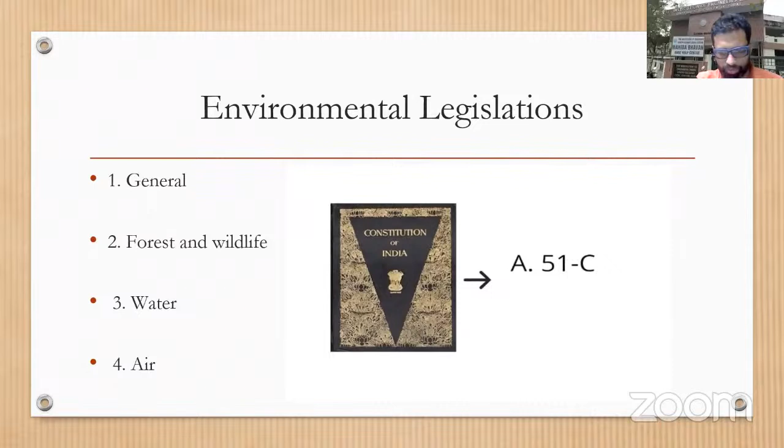I'm going to talk about one forum, the Stockholm Declaration 1972, which says the whole world has one environment. We can accept this with heart, right? The whole world is one environment. So accordingly we have to think and act to save each place. If I protect the environment at my place, my area, and similarly everyone protects theirs, then we are able to save the environment of the world.

For that, Article 51 of the Constitution of India says that we have to follow and implement a framework to save the environment. It means this article empowers our country and our parliament to frame and establish regulations through which we can save the environment, save the sanctuaries, and save our natural resources. This is shared in Article 51C.

Now, in general, how did it start? First, the international forum in 1972. After that, in 1986, the first Environmental Protection Act came, empowering the central government to protect and improve environmental quality, control and reduce pollution from all sources, and prohibit or restrict the setting up and operation of any industrial facility on environmental grounds.

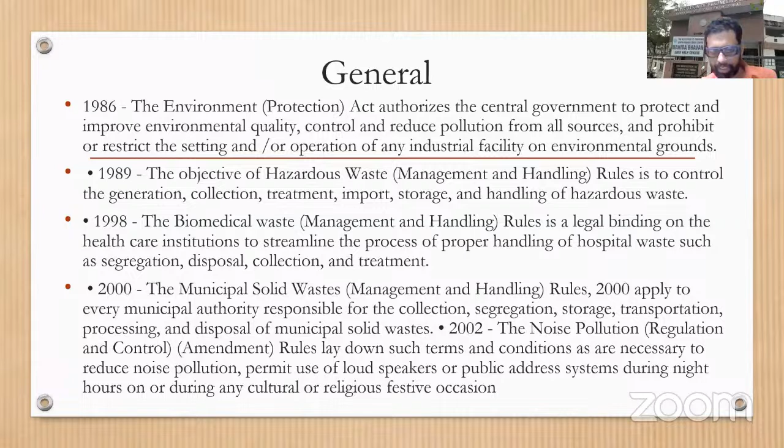If we talk about forest and wildlife, the Indian Forest Act of 1927 and its 1984 amendment were implemented regarding how we relate to the forest, transit of forest produce, and the levy on timber and other forest produce.

So in 1972, the Wildlife Protection Act, with its amendments, talks about the protection of birds, animals, and all the matters connected to them, whether it is their habitat or the forests that sustain them, right? In 1980, we implemented the Forest Conservation Act, with rules in 1981, which provide for the protection and conservation of the forest.

In 2002, right, we have the Biological Diversity Act, which provides for the conservation of biological diversity, sustainable use of its components, and fair, equitable sharing of the benefits arising from biological resources and the knowledge associated with them.

As concerns water, in 1974 the Water (Prevention and Control of Pollution) Act was established. It is regulated through the Central Pollution Control Board in Delhi. In 1977, the Water Cess Act provided for the levy and collection of a cess on water consumed by industry and local authorities. So we implemented these things so that we can reduce the wastage of water.

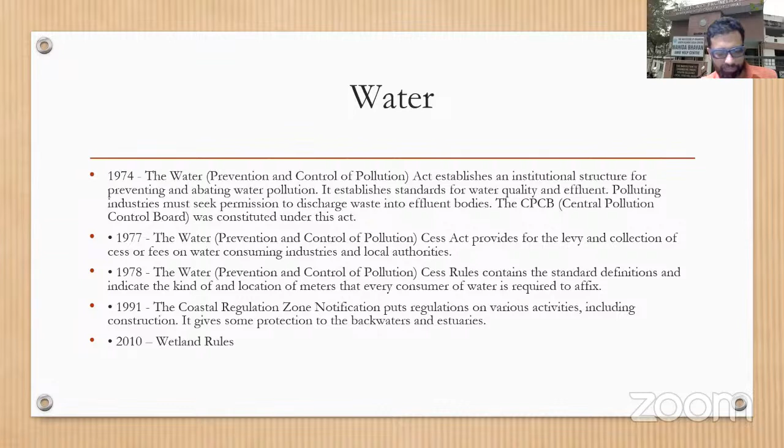In 1991, the Coastal Regulation Zone notification put regulations on various activities, including construction. It gives some protection to the backwaters and the estuaries. And in 2010, the Wetland Rules also came into the picture.

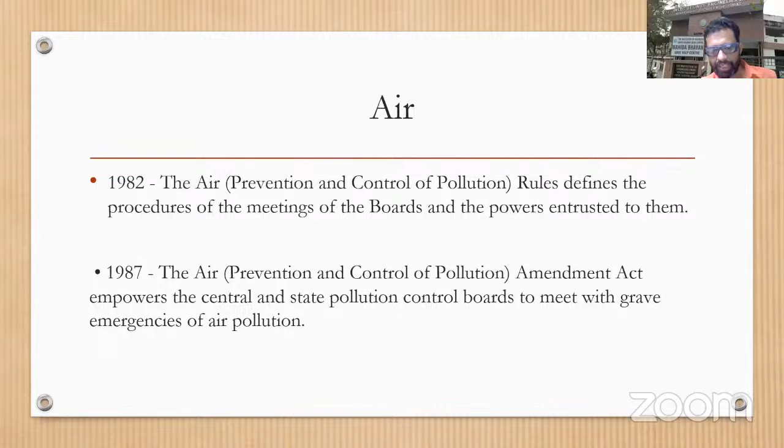As concerns air, we have also worked a lot in this regard. In 1982, the Air Rules defined the procedures for meetings of the boards and the powers entrusted to them. In 1987, the Air Amendment Act empowered the central and state pollution boards to meet grave emergencies of air pollution. Yes, so in India we are not only dependent on the Central Pollution Board, but every state has its own authority that can establish rules accordingly.

In 1986, we have the Environment Protection Act, which covers water, air, land, and the interrelationship existing between water, air, land, human beings, other living creatures, plants, microorganisms, and property. Environmental pollutant means any solid, liquid, or gaseous substance present in such concentration as may tend to be injurious to the environment. Environmental pollution means the presence in the environment of any environmental pollutant.

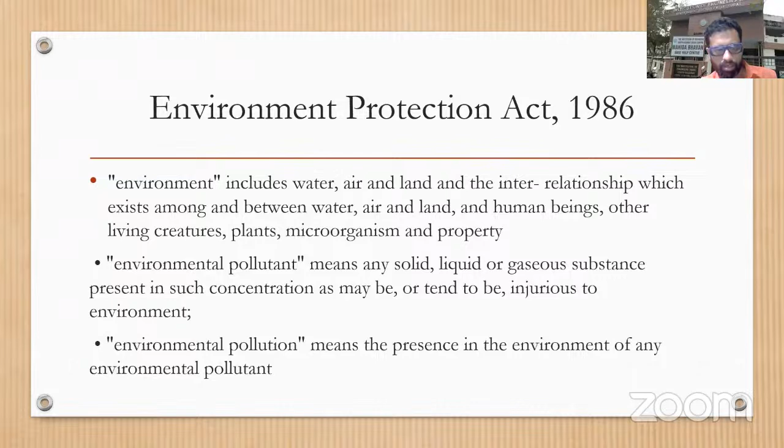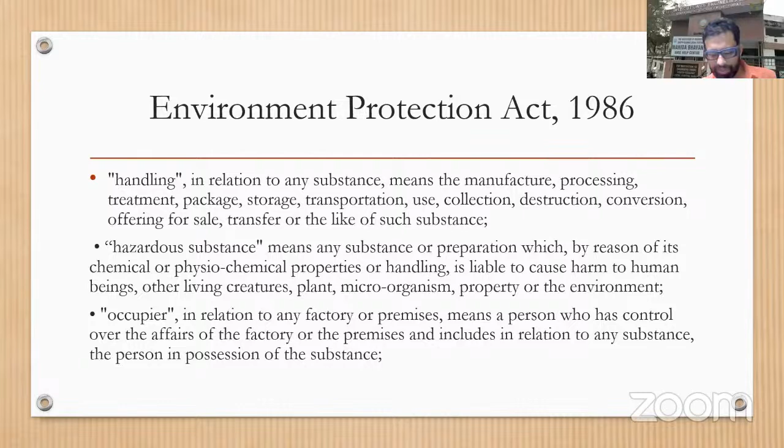Apart from handling, storage, and collection, we have also made frameworks and networks through which we can protect the environment. So these are all written, documented, and practiced accordingly. The framework has been given, and we are following its guidelines.

But the requirement under the EPA, the Environmental Protection Act, Section 7, says no person carrying on any industry, operation or process shall discharge, emit, or permit to be discharged or emitted any environmental pollutant in excess of the standards as may be prescribed. It means whatever practice, profession or business we have, it should not harm the environment in the short term or have adverse effects in the long term.

Section 8 says no person shall handle or cause to be handled any hazardous substance except in accordance with such procedure and after complying with the safeguards as may be prescribed. So suppose some businesses or authorities are using hazardous material, like somebody involved with X-rays and other hazardous things. They must follow the procedures, right? They have to go through the procedure, follow it, and proceed forward.

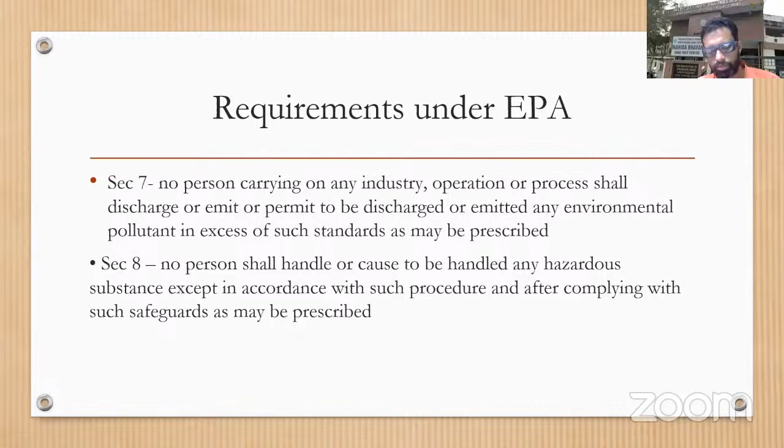Apart from that, in India we have the National Environment Tribunal Act. In this act there is strict liability for damage arising out of any accident occurring while handling any hazardous substance, and for the establishment of the National Environment Tribunal for effective and expeditious disposal of cases arising from such accidents, with a view to giving relief, compensation, and damages. Sometimes cyclones and natural calamities come, and in that way it is going to be more effective. That comes in the category of the National Environment Tribunal Act.

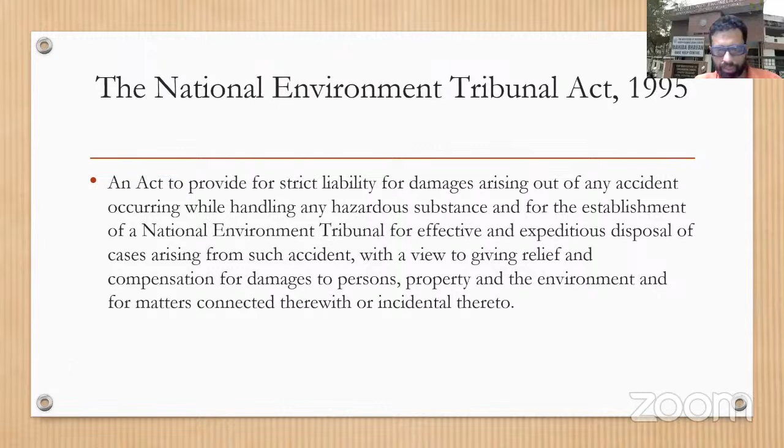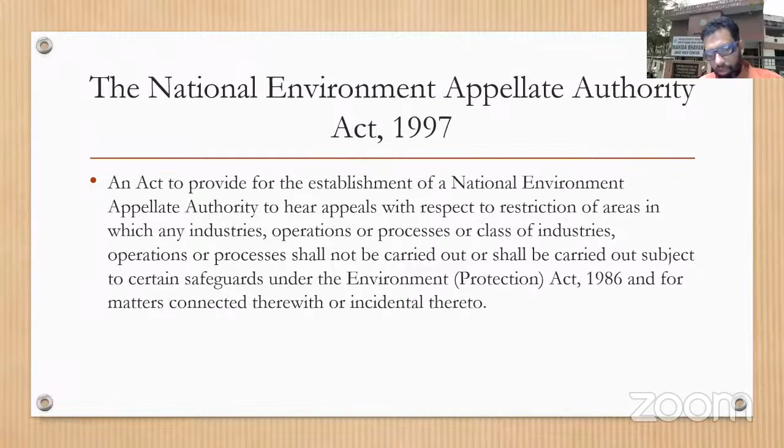Apart from that, we have also established the system of the appellate authority. This act empowers the establishment of the National Environment Appellate Authority to hear appeals with respect to restriction of areas in which any industry, operation, process or class of industries, operations or processes shall not be carried out or shall be carried out subject to certain safeguards under the Environment (Protection) Act 1986, and matters connected therewith or incidental thereto. So in this way, we have an authority to which we can appeal when things go wrong. So this is the brief detail about environmental legislation in India, right?

So now I'm going to hand over to my ex-colleague Umesh Mate. He's going to present the systems we call DeNOx and DeSOx, and after that I'm again going to take the session on how we control SPM and NOx, and what lucrative benefits are present, in my next sessions. So welcome Umesh.

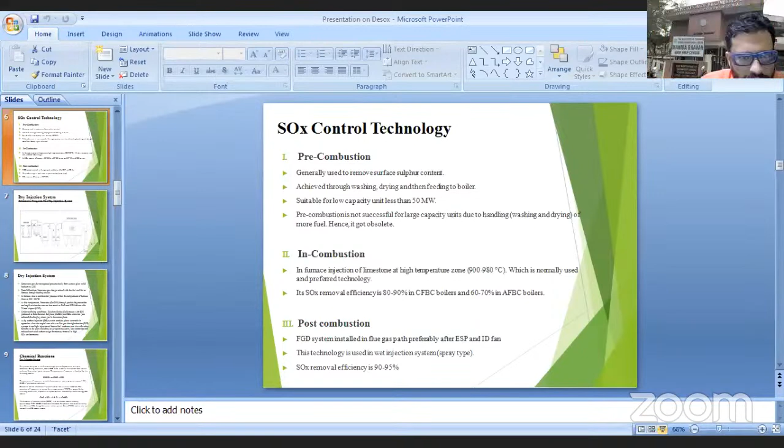Pardon, Umesh, your slide is not moving. Slide is not moving? Yeah, it is still in the first slide. Just please change it. Now? Now just put it in full slide mode. Slideshow. Now it is visible? No, your screen sharing is paused. Oh, okay, just a minute. First stop the screen and then I will share it again. Yes. Perfect, good. Continue. Should I go to the previous slide? Yes, you can do slides 1 and 2 and then pick up. Okay, sorry for the inconvenience.

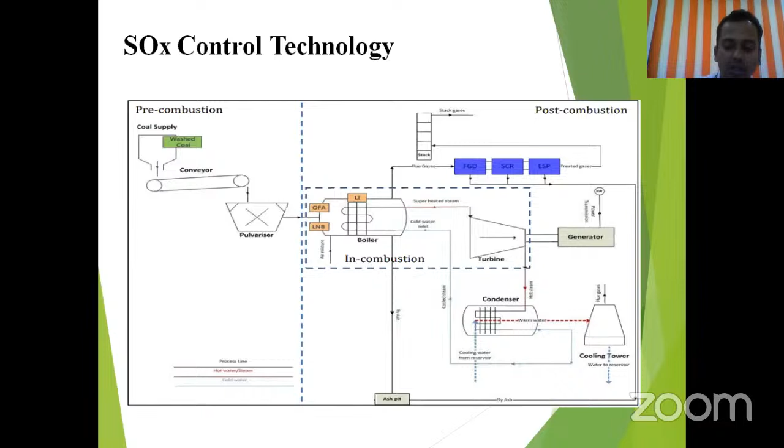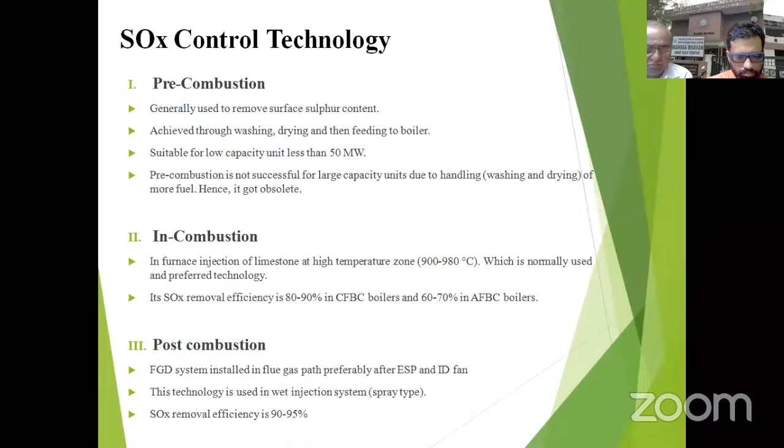I was talking about SOx control technology, which we do in 3 parts: pre-combustion, in-combustion and post-combustion. Pre-combustion technology is used to remove the surface sulfur content. Sulfur in the fuel is of 2 types: surface sulfur present on the surface of the fuel, and inherent sulfur. Removal is achieved through washing, drying, and then feeding to the boiler. Normally this technology is used for low capacity units less than 50 megawatt, because fuel handling capacity is less. It is not suitable for large units due to the washing and drying of fuel. Hence this technology became obsolete.

The next is in-combustion technology, basically furnace injection technology. Limestone is fed into the boiler at a high temperature zone in the furnace, around 900 to 980 degrees centigrade, achieved through burning of the fuel. At this temperature limestone is fed into the furnace. This is a dry injection system, and the SOx removal efficiency is 80 to 90% in CFBC boilers and 60 to 70% in AFBC boilers.

Then the next technology is post-combustion technology, installed in the flue gas path, preferably after the ESP and ID fan. This is basically a wet FGD system, spray type. I will show the principle of this wet technology in my further slide. Here, SOx removal efficiency is very high, almost 90 to 95%.

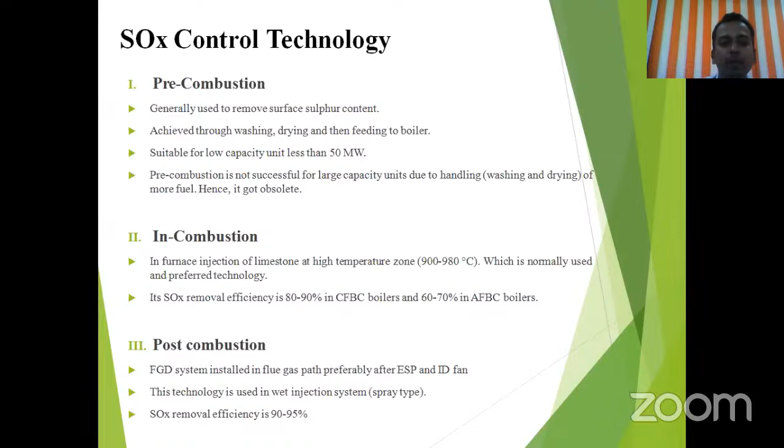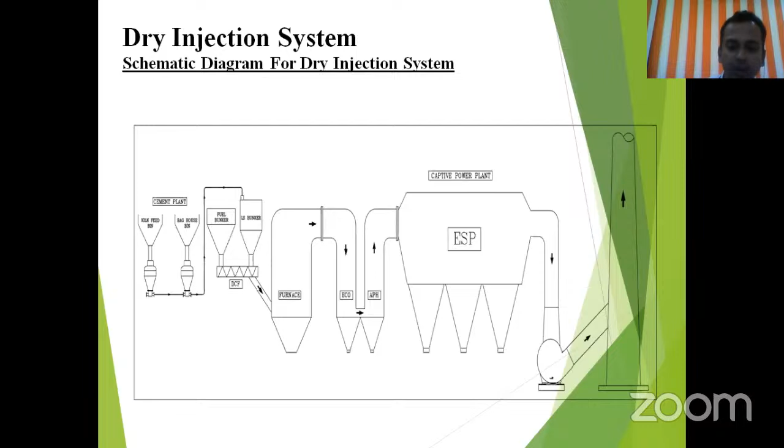Yes, this limestone powder is transported pneumatically from cement plant to LS bunkers at CPP. And from these LS bunkers, limestone powder gets mixed with the fuel and fed to furnace through feeding chutes. In furnace, due to combustion process of the fuel, the temperature of furnace rises to 900 to 980 degrees Celsius.

At this temperature, limestone, through particle fragmentation and rapid calcination, converts into reactive CaO, and this carbon dioxide is driven off with the water vapor. Further, under oxidizing conditions, this calcium oxide reacts with the SO2 produced to form calcium sulfate, and SOx emission gets reduced, discharging clean gas in the atmosphere.

This is basically a dry sorbent injection system, which enables plants to remain in operation when the capital cost of a wet flue gas desulfurization is high. The dry sorbent injection initial capital cost is low as compared to wet FGD system. And this injection of alkali sorbents can also offer other benefits to the plant, including lower operating cost, less corrosion, and reduced activated carbon usage for mercury removal in high SO3 environments.

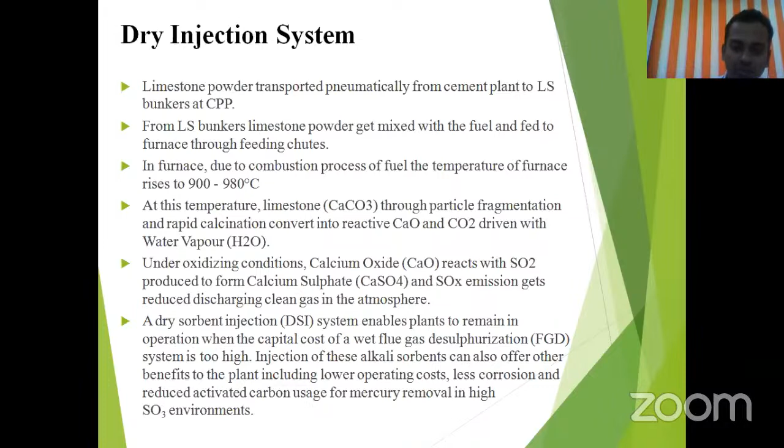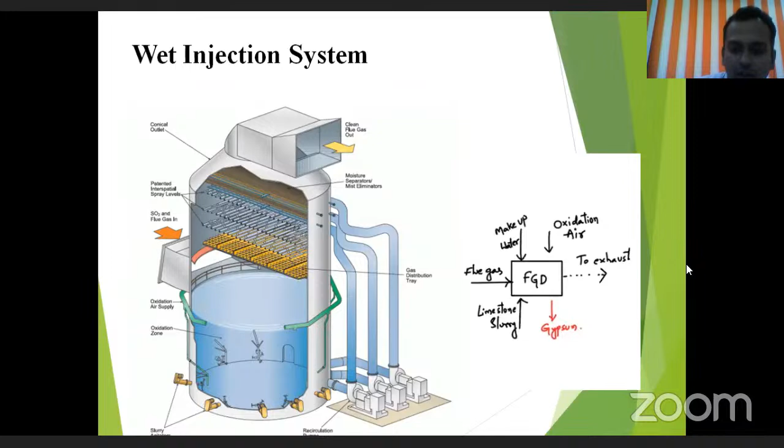This is the reaction of wet FGD system: limestone CaCO3 reacts with SO2 and water to form calcium sulfite, and carbon dioxide is removed with the flue gas outside. This calcium sulfite hemihydrate further reacts with the water and oxidation process, forming gypsum.

Yes, this flue gas from ESP enters near the bottom of the absorber and travels towards the top of absorber through gas distribution tray. Alkaline slurry is present inside the absorber, which is pumped to the top of absorber via recirculation pump into the spray level to be sprayed on the flue gas. Flue gas reacts with the alkaline slurry in order to form CaSO3, calcium sulfite.

This calcium sulfite then settles down to the bottom of absorber. Clean gas then goes through the mist eliminators to remove the moisture and finally goes to the stack. At the bottom of the absorber, oxidation air is passed with the help of oxidation air supply and mixed with calcium sulfite to produce gypsum, which is then used for further process.

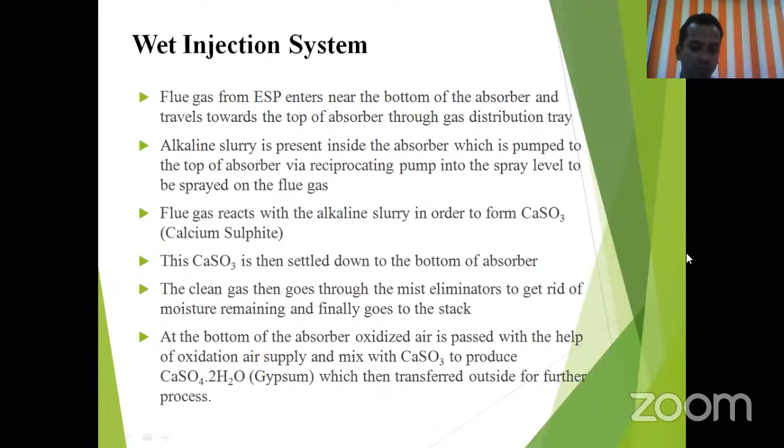Coming to mass balance, this is typically sulfur S plus O2 gives SO2, as you all know. So suppose 32 grams of sulfur and 32 grams of oxygen combine, it gives 64 grams of SO2.

I have taken an example of a typical 125 megawatt coal-fired power plant, where approximately 100 TPH of fuel is being fired. Suppose 0.5% sulfur is there in the fuel, so if you fire 100 tons of fuel, 0.5 tons of sulfur content is present in the fuel. If the unit is running for 1 year, that is 365 days, I've calculated total sulfur production.

SOx is almost double of the sulfur, meaning 1 kg of sulfur gives 2 kg of SOx. So if you calculate the SOx produced per year in this 125 megawatt coal-fired power plant, it's almost 8760 tons of SOx which is produced. You can see how much SOx this power plant is generating, 8760 tons, which is very high.

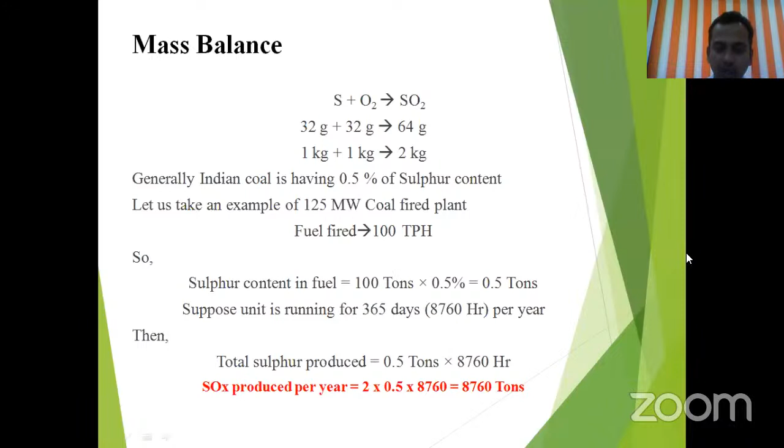This is the mass balance of the wet FGD system. This is the scrubbing module, which I have explained in my previous slide. You can see the flue gas, this SO2, this is a 500 megawatt unit, pulverized coal-fired plant.

These are the parameters I have taken for the 500 megawatt PF fired unit, where the SOx generated is 19.1 meter cube per hour. After this scrubbing module, almost 90% sulfur capture has happened, and the clean flue gas is almost 1.91 meter cube per hour, it has been reduced. This is the makeup water required, 68 TPH.

This is the mass balance of a typical wet FGD system.

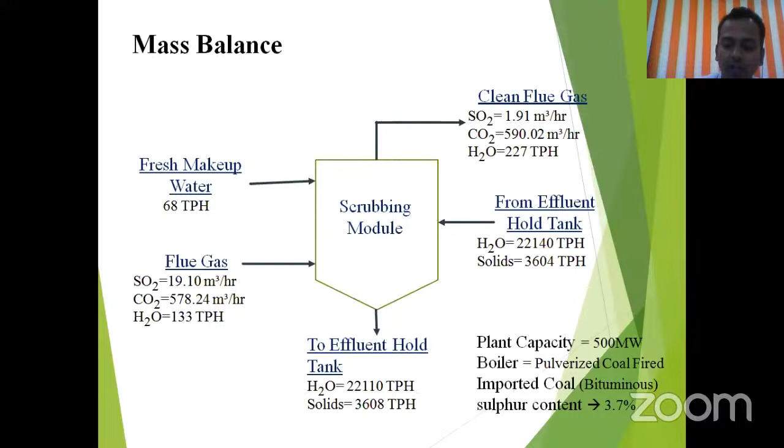Coming to reaction efficiencies: a dry injection system's efficiency is around 80 to 90% in CFBC and 60% in AFBC boiler, because CFBC has a long shaft furnace where residence time of the fuel is high compared to AFBC boiler. Hence combustion of the fuel and reactions with the limestone are very good and very fast in case of CFBC boiler, so its dry injection efficiency is higher than AFBC. Wet injection system has a very high efficiency of 90 to 95%.

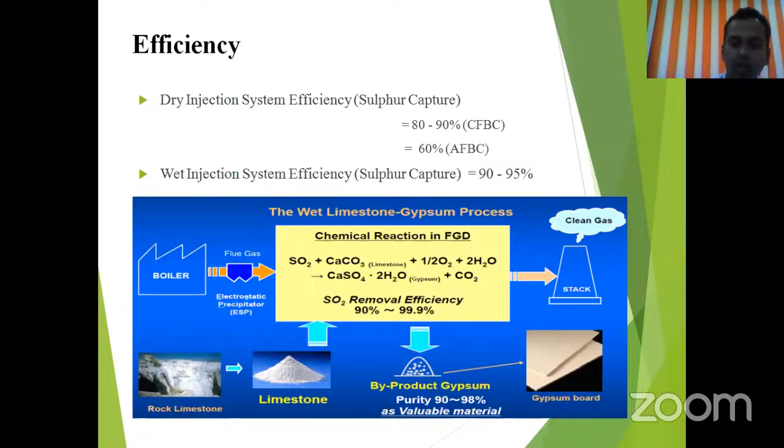Coming to environmental norms, SOx has restrictions. The units installed before December 2003, for less than 500 megawatt units, the limit was 600 milligram per nm cube, and for units greater than or equal to 500 megawatt, it is 200 milligram per nm cube.

Units installed after January 2004 and up to December 2016 had the same restrictions levied: for SOx, less than 500 megawatt is 600, and greater than or equal to 500 megawatt is 200. Units installed after January 2017 have a restriction of 100 milligram per nm cube for all capacity power plants.

Now, what are the challenges for this FGD system? The wet FGD system basically has a high capex, a high capital cost because of imported items which we have to bring in. There are so many items we have to import from abroad, and due to the high setup cost, this is a very huge challenge for a wet FGD system.

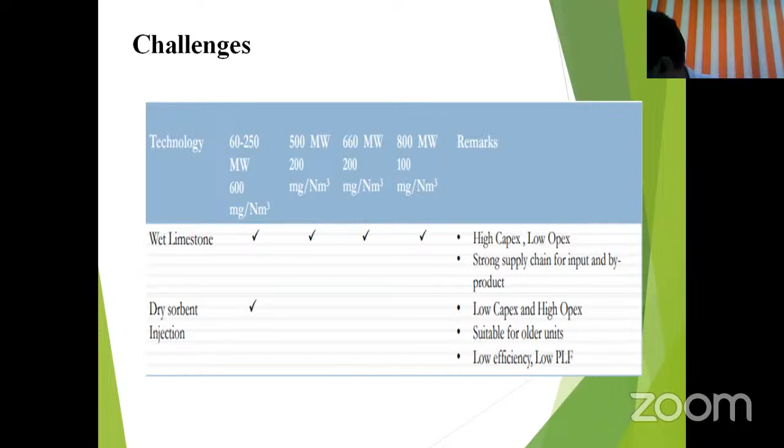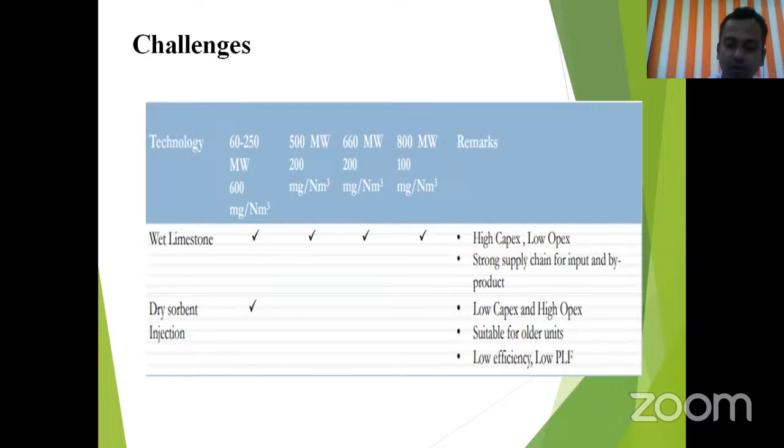Operational cost is low, and there's a strong supply chain needed for input and byproduct. For the dry sorbent injection system, the capex is low, meaning capital cost is low compared to wet FGD, but operational cost is high, and maintaining the system is very costly. This dry FGD system is basically suitable for older units and low efficiency, low PLF plants, which I told you in my previous slide.

Further challenges: technology suppliers are mostly situated abroad. Mostly we have to import items from China and Germany for installing this FGD system, wet FGD system. Indigenous manufacturing capacity needs to be developed and ramped up fast. FGD retrofit is difficult in many of the older stations due to space constraint.

FGD retrofit is difficult in many of the older stations due to space constraints, because older units were already optimized for less space, and fitting this FGD is a difficult task. Approximately 80,000 megawatts of total installed capacity of units less than 500 megawatts will be affected due to no availability of space for the retrofit.

Large consumption of water is required, about 0.25 meter cube per hour per megawatt of water, for wet FGD. This is one of the challenges in wet FGD systems, along with the impact on power supply position due to closure of most coal-based capacity for non-fulfillment of environmental norms.

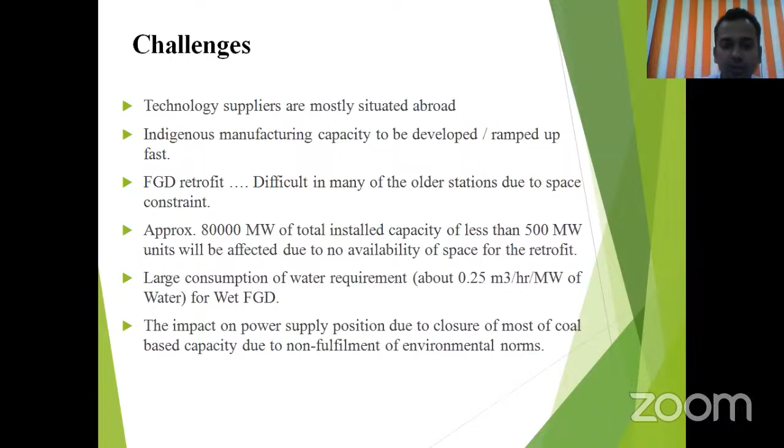These are further challenges: huge capacity with deadlines. The FGD market is now developing in India.

Recently, just 2-3 days back, I got to know that this FGD system deadline has been extended from December 2022 to 2025, because of the challenges I mentioned. It is almost difficult to install the FGD system in such huge capacity power plants. Number of units is a big challenge for us; retrofitting and installing the FGD in this lesser time is a very difficult task. So that's why, due to COVID also, the government has again extended this FGD installation deadline to 2025.

Now coming back to challenges: limited vendors are available, about 30% of FGD items need to be imported. There's increasing manufacturing time due to overbooking of suppliers, increasing cost, and funding issues in private plants.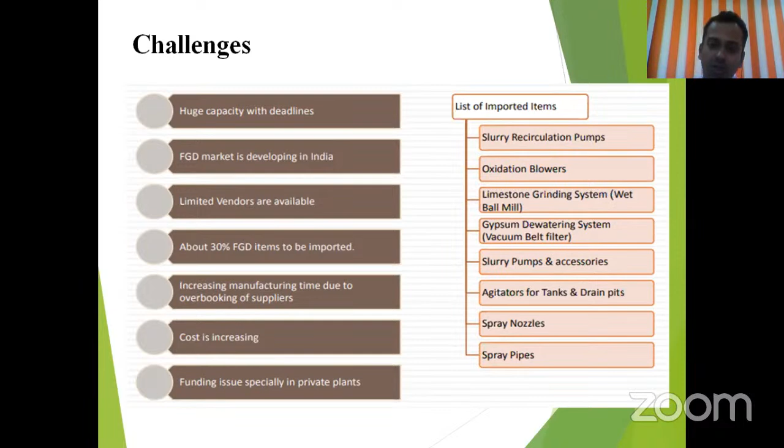These are the list of imported items which we import from Germany and China: recirculation pumps, slurry recirculation pumps, oxidation blowers, limestone grinding system, gypsum dewatering system, slurry pumps and accessories, agitators, spray nozzles, spray pipes - all are imported items.

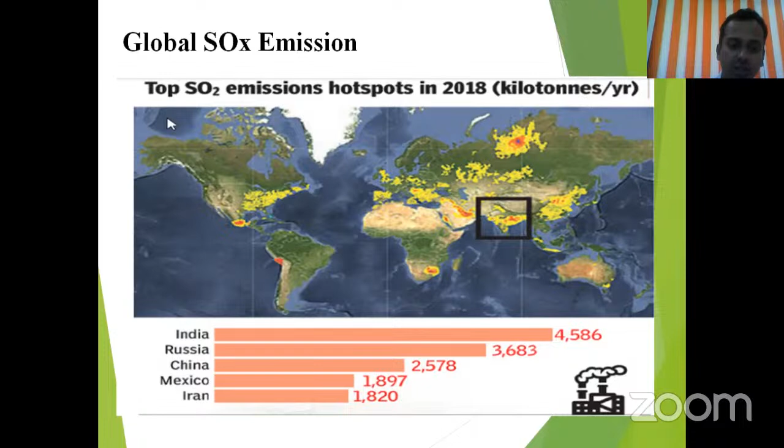Global SOx emission data for 2018: total SOx emissions in 2018 show India was number one in 2018 for SOx generation, approximately 4586 kilotons of SOx was generated in India. Second is Russia, third is China, fourth Mexico and Iran.

Now, what is the effect of SOx? Basically, the effect of SOx on environment is when SO2 combines with water and air, it forms sulfuric acid, which is the main component of acid rain. This acid rain can cause deforestation and also can affect aquatic life, acidifying the waterways to affect aquatic life, flora and fauna. This acid rain also results in corrosion of buildings and structures, and chimneys in the power plant.

Further, the effect of SOx on health: SO2 can cause respiratory problems such as bronchitis and can irritate your nose, throat and lungs. It may also cause coughing, wheezing, asthma attacks, and it has also been linked to cardiovascular diseases. So it has a very dangerous effect on the environment as well as on the health of the human body.

I would also like to share the cost data to set up this FGD system in thermal power plants. As per available data, installation of FGD in thermal power plant costs approximately rupees 19 lakhs to 90 lakhs per megawatt. Obviously it depends on the size of the unit, number of units, the locations, and the technology used.

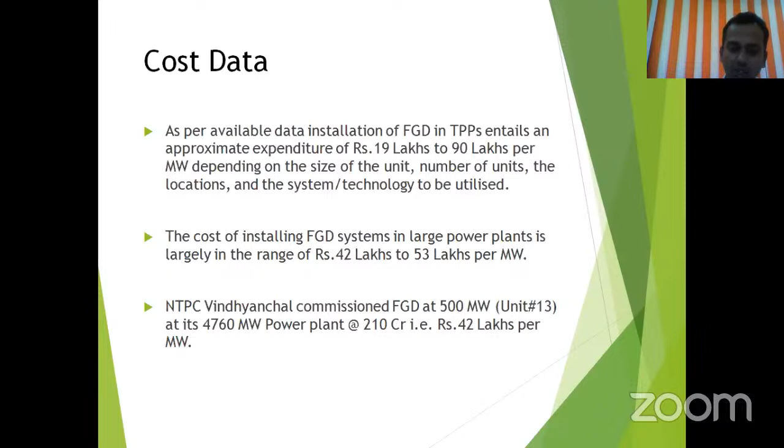The cost of installing FGD systems in large power plants is largely in the range of rupees 42 lakhs to 53 lakhs per megawatt. Recently, NTPC Vindhyanchal commissioned FGD at 500 megawatts, unit number 13, at its 4760 megawatt power plant, at 210 crores, that is rupees 42 lakhs per megawatt. So we are not very far, and that's all. Thank you.

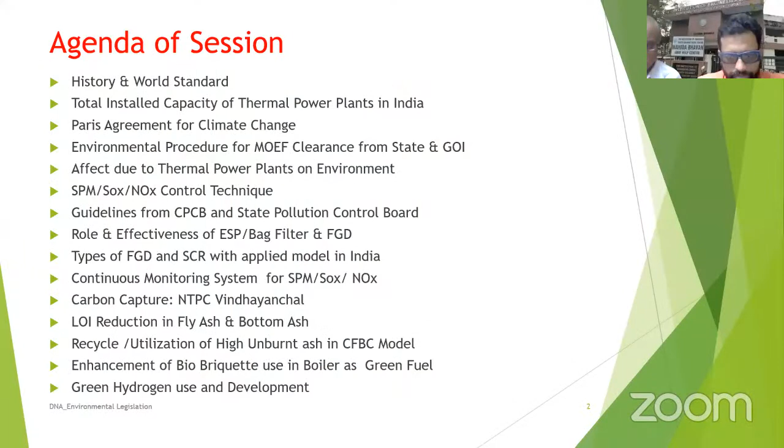So once again, welcome to all the participants of today's webinar, and thank you for connecting and showing confidence with this. I am Dinanath Akela, and again I am going to talk about this SPM and NOx system. Before that, I'm going to talk a little bit about what we currently follow.

In regard to emissions, first I'm going to target the emission rate. The average emission in our country from 2019 is growing at a percentage of 1.4%, and the average per decade, from last decade, is 3.3%.

If we talk about what the government of India has done in context of controlling emissions, first I would like to thank the Supreme Court that with their decisions and strict application, the Bharat Stage 6, BS6 norms have been implemented, and lots of advantages and emission problems are going to be sorted out.

The second is about the National Solar Mission. As we talk about the era of the last decade, around 2005-2006, the ratio of thermal and solar power was 80% and 20%. But right now we have some latest data showing this ratio has lots of differences; now it is approximately 67 to 70% thermal and 30% is reached right now through the operation of solar energy and solar plants.

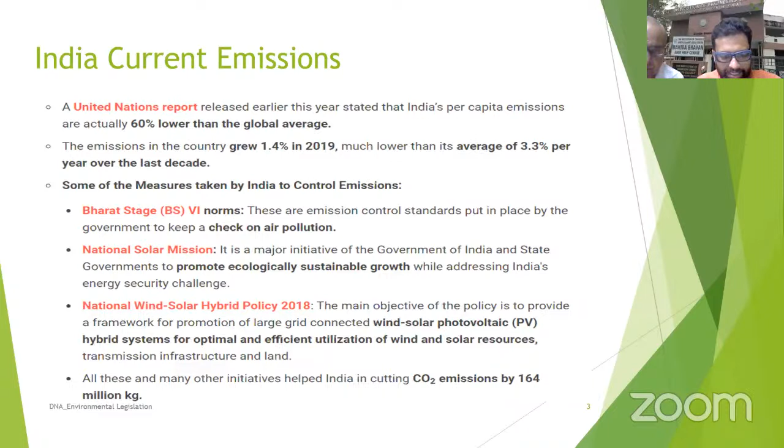Next, what is making a big difference is the National Wind and Solar Hybrid Policy of 2018. This initiative is going to help India cut off CO2 emissions by 164 million kg.

If you talk about last year's COP26 address by the PM, we are going in the way of non-fossil fuels. We are going to complete 50% of our fuel and energy requirement through renewable energy by 2030, bring down the carbon intensity of the Indian economy by more than 45% by 2030, and cut down net projected carbon emissions by 1 billion tons from now until 2030. We have also targeted net zero carbon emission by 2070.

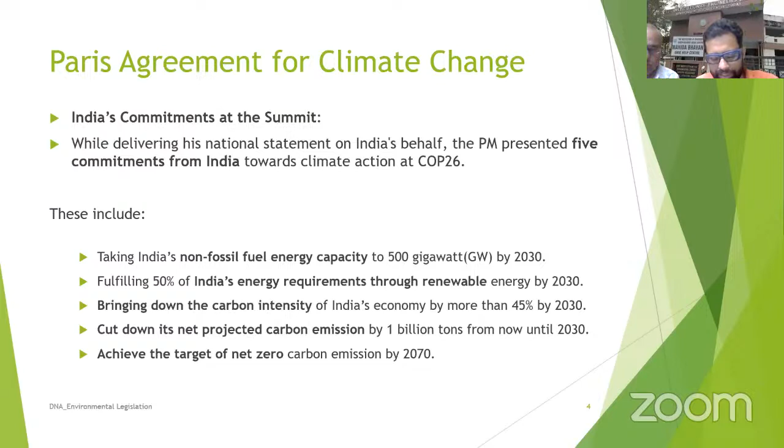So this is a little bit about the targets we have set for the future. Now I am going to give you details about the severity of emissions. I have taken one example of a 500 megawatt coal-based power plant, where we are using domestic Indian coal, and in that category I'm going to tell you how severe it is.

So if we talk about how much flue gas emission is going to be generated, that is 1760 cubic meter per second. And if we measure on the average value of 100 milligram per normal meter cube of SPM, then it is going to produce a total of 472 kg per hour.

And if we talk about SO2, I'm going to calculate on the basis of only 0.5% of sulfur in the coal, right? On that basis, if we calculate for 2 x 500 megawatt PF boilers, it is going to generate 8,600 kg, or we can say 8.6 ton per hour of SO2, right? So definitely it is going to harm society and the environment a lot.

That's why it is a big concern of the Central Pollution Control Board and the authorized authority. If you talk about NOx, it is going to generate 2.7 ton per hour. So this is some data. And now, what is the world going to maintain, and what standard do we have?

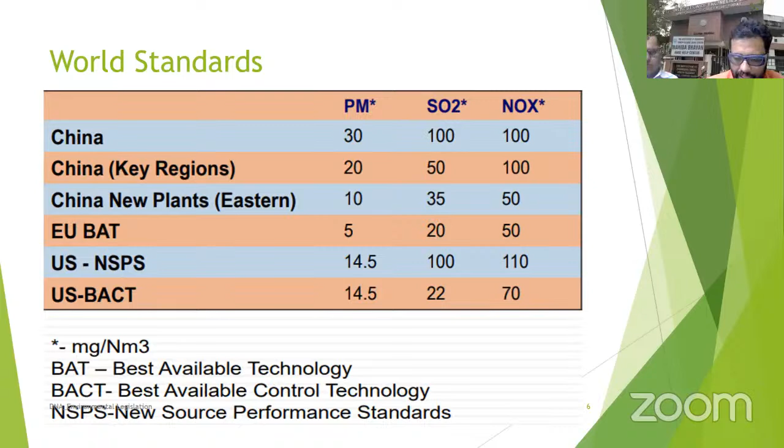Right. So PM means the particulate matter. In China, they have the target of 30 milligram per normal meter cube, SOx is 100 and NOx is 100. So the same we are also going to maintain in India too. So this is what we are going to show. This was a little bit older data, right?

So now the extensions of the deadline for implementation of all the measures, right? 30 of SPM, 100 and 100 of NOx had the deadline of 2022, but it has shifted in the last amendment, on 5th of September 2022, and the next dates come in 3 phases. First is 23-25, second is 24-25, and third is 25 to 27. Based on capacity and the level of their emission, the deadline is going to be set.

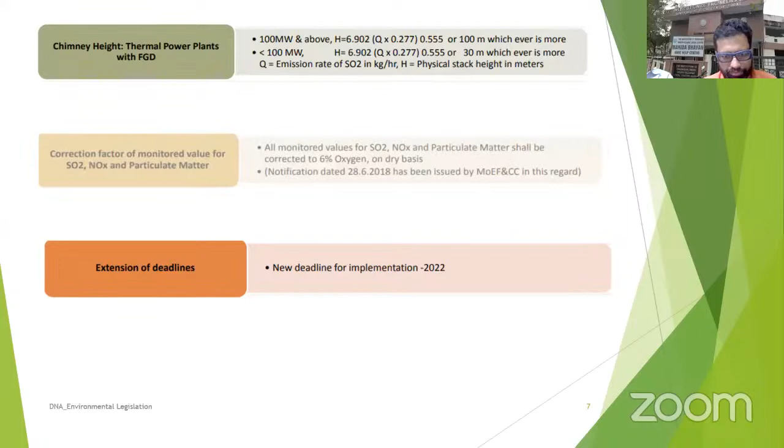Now, what issues are we facing with the regulations we are going to implement? The first thing is that this requires funds, and these funds we have to cope with either through capex or through opex, right? Apart from that, if we go through the evolution of the emission standards in the thermal sector, first in 1984 we set PM at 150 milligram per normal meter cube. After that, in 1989 we set the stack limit, right? The stack limit is 14 Q to the power 0.3. We set the stack height with this formula.

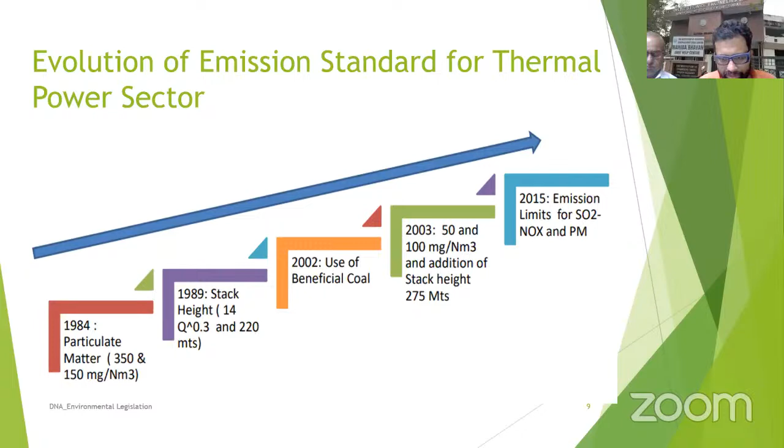After that, to minimize the SOx and sulfur, we used beneficiated coal. In 2003, we set the limit of 50 and 100 milligram per normal meter cube, and the stack height for additional is 275 meter. In 2015, we also set new limits for SOx, NOx and particulate matter too. So this was the data for the environmental norms we were going to follow from January 2017, but it has to be changed a little bit.

Some of the participants want to know about mercury, right? They asked the question in the chat box about mercury, so I'm going to tell you about that. Indian coal has a very small amount of mercury, so that's why this limit is very low. It is in the range of 0.03 milligram per normal meter cube.

If we talk about consumption, the specific water consumption per megawatt hour is 3 meter cube, and we have set the target for zero liquid discharge, right? Which again was implemented on 19th of October 2020.

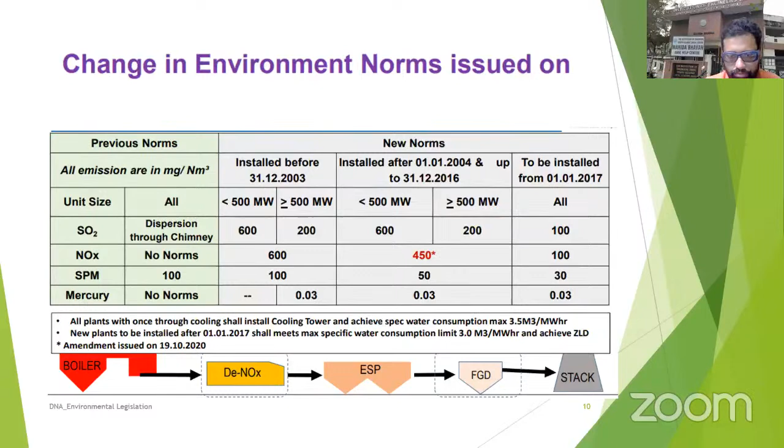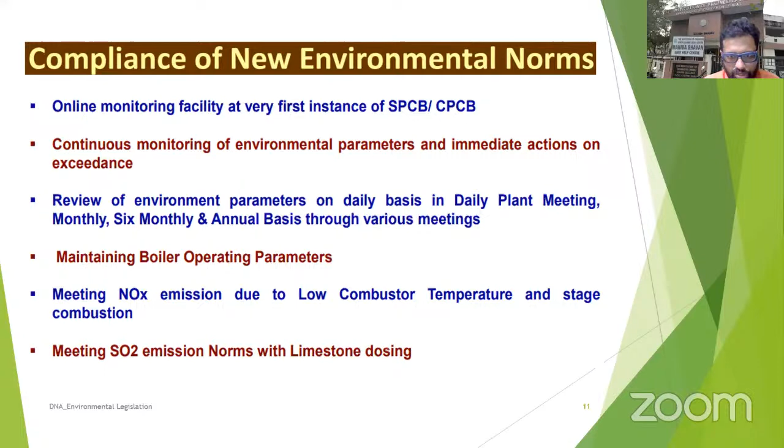But one of the good things is that all the plants have to show their current emission values at the entry gate of their plant, and this data is now connected with the state pollution control boards and the central pollution control boards, right? Just to add one thing: last week the government of Rajasthan declared that some installations have achieved this, and their real emission data values are coming to the state pollution control boards.

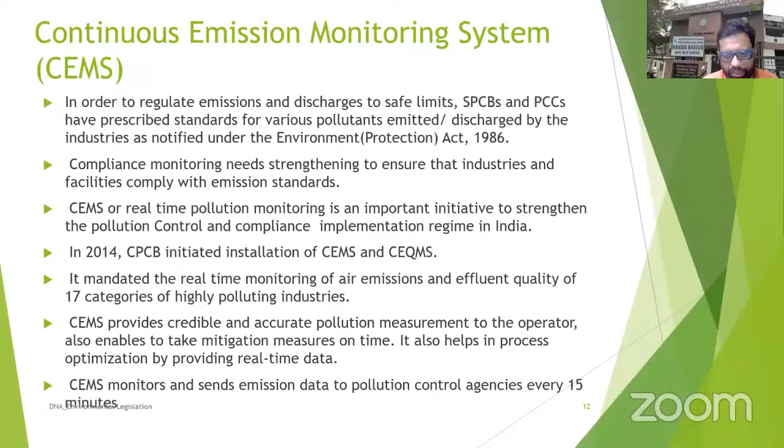So this way we have to continuously monitor every industry: what values they operate at and what values they maintain. For that, we have a technology called continuous emission monitoring systems. Depending upon the capacity and the installation, we put this CEMS at one-third of the height of the chimney, and through this CEMS we get real-time data on SOx, NOx, and SPM.

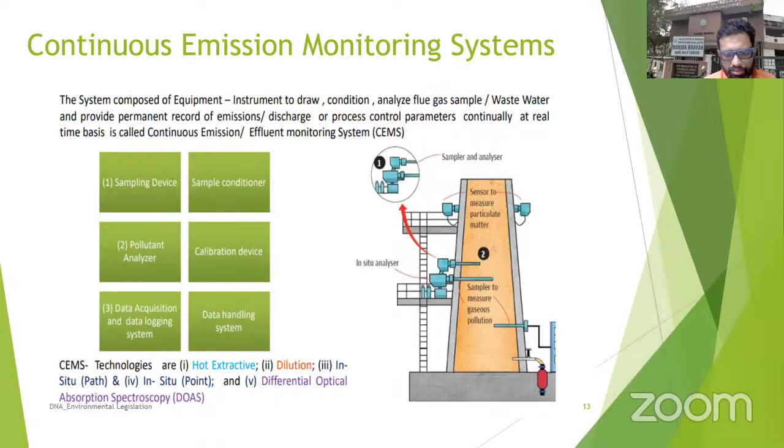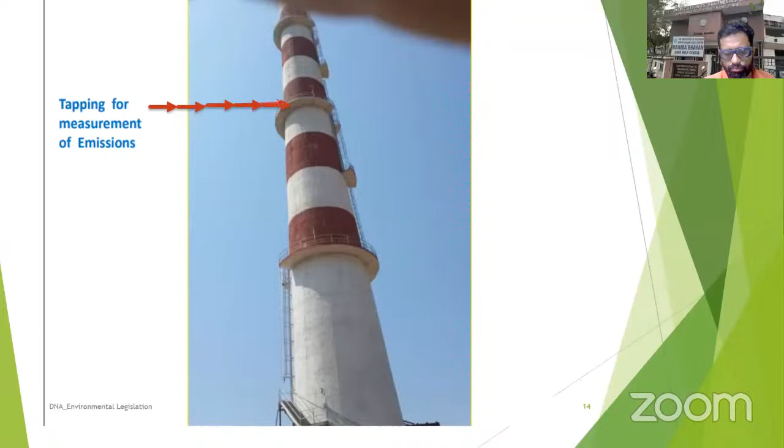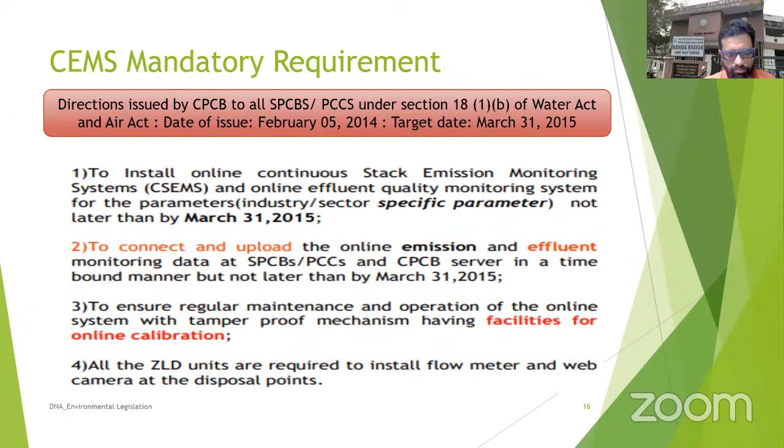So we have advantages of the CEMS: the real-time data we are getting, and remote access for the operator and regulator. The data comes on a bimonthly or quarterly basis, so that they can see the data, cross-check it, and check their calibration reports. Based on that, they approve the reports.

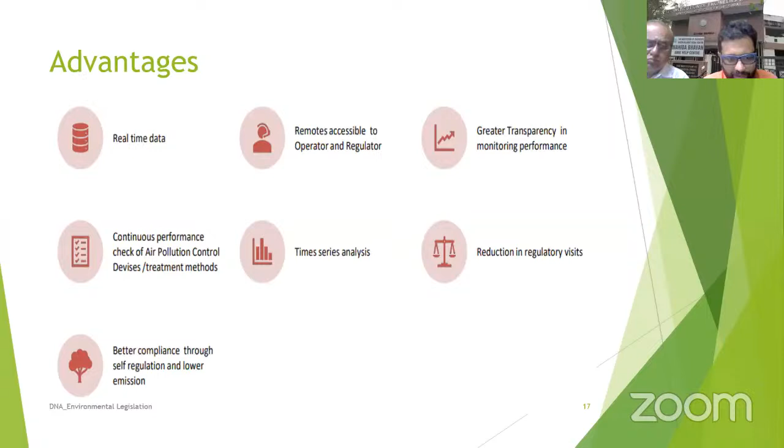Now, if we talk about SPM, suspended particulate matter, the details of what we are going to analyze I have collected from the list from the Ministry of Environment, Forest and Climate Change, where these details are mentioned, along with the method by which we analyze them.

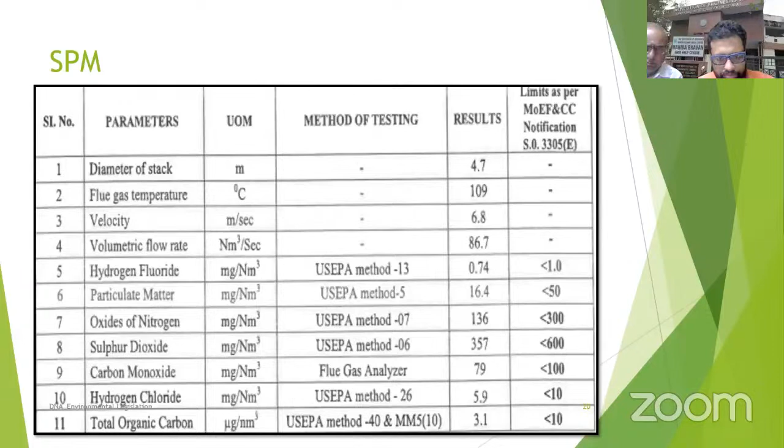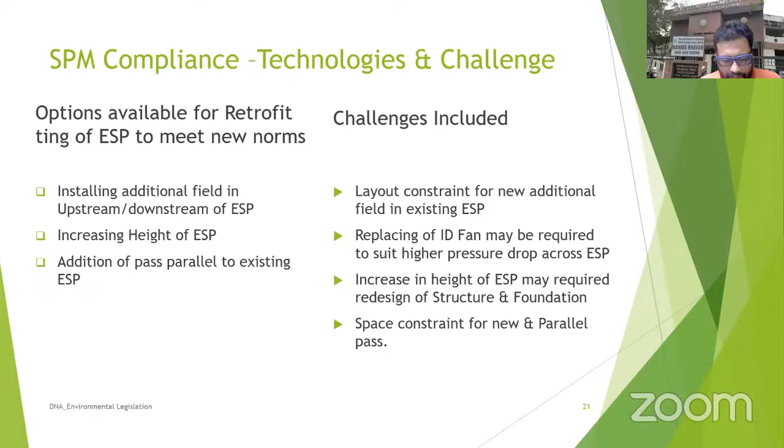For SPM, we have to apply the ESP, right? Suppose our existing ESP is not capable of meeting the desired SPM limits; in that case we have to place a new ESP or add another field so that we can meet the required standard. This is the predicted emission of a 500 megawatt coal-fired power plant with Indian coal, as I have noted here.

Suppose we have 500 megawatts. I take only Indian coal, 100%, with a consumption of 7,000 tons per day, and the average sulfur content of Indian coal is 0.27%, right? On that basis, the sulfur burned per day is 18.9 tons and the emission is 37.8 tons.

Because we know S plus O2 forms SO2. 32 and 32 make 64. That's why if the sulfur is 1, the SO2 will be double. So you observe here that the SO2 is double the amount of sulfur burned. Based on that, I calculate, right?

Please look at this data showing how much SO2 emission there is in ppm. It comes to 359, right? But we have set limits right now, which is 200 as of 2016.

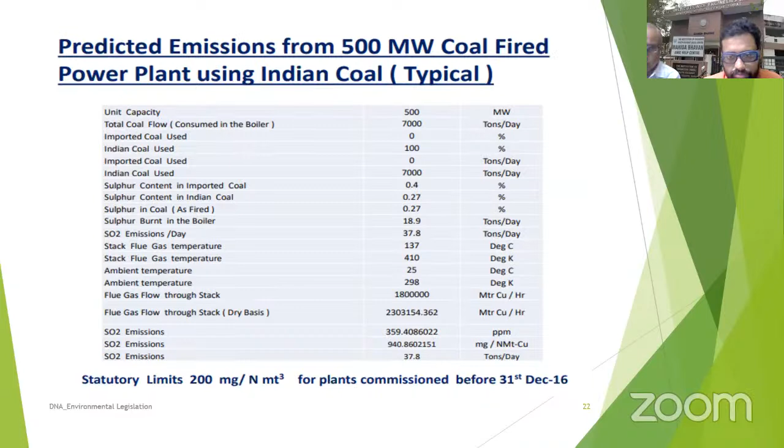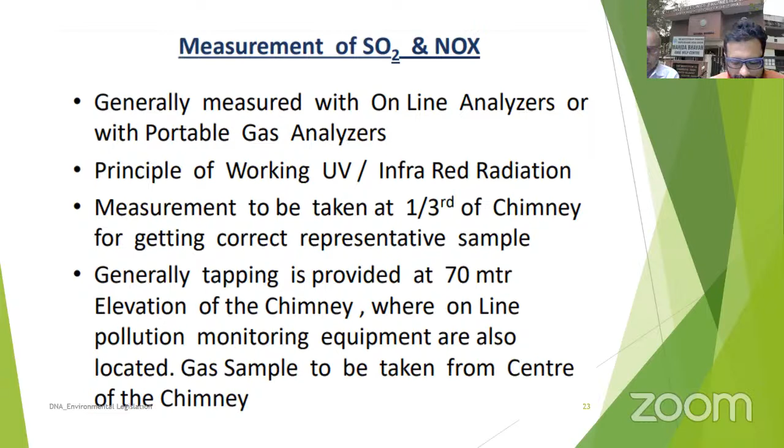But as of now, we are following the 1st August 2017 norms, so it should be less than 100. Right. So for that, we have to use the FGD or DeSOx system. For the measurement of the SOx and the NOx, we have the analyzer systems, which work on the infrared radiation method, and we place this device at 1/3 of the chimney. That depends a little on the size and the capacity of the unit, but generally we can do it. We can take the sample and cross check and calibrate with the standard.

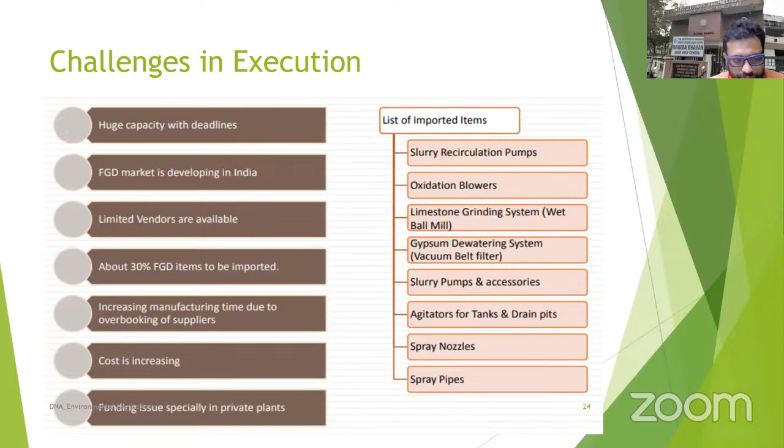Now, why is it not going in a smooth way? Because of the challenges in execution, right? The plant is running, we need shutdowns, and the spares and materials are required, right? These materials are imported, about 30%. The ordering and delivery is a time-taking process. The cost also contributes. So that's why the execution has challenges.

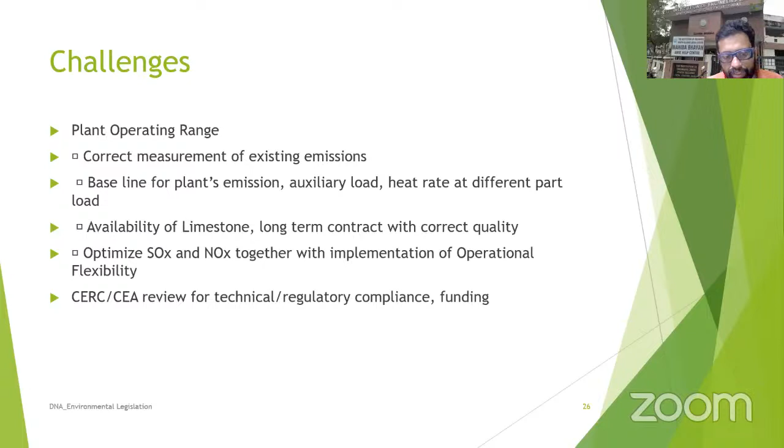Right. Other factors. So we have decided to go phase wise, right? So that when we have the opportunity during the shutdown periods, we can implement the systems. The challenges: the plant operating range, the correct measurement of existing emissions, the baseline plant emission, auxiliary loads, heat rate at different parts of the load, and availability of limestone, because in SOx control we use lime. Optimization of SOx and NOx versus operational flexibility, because if the unit is working on part load, it is difficult to judge the correct amount of limestone feeding required.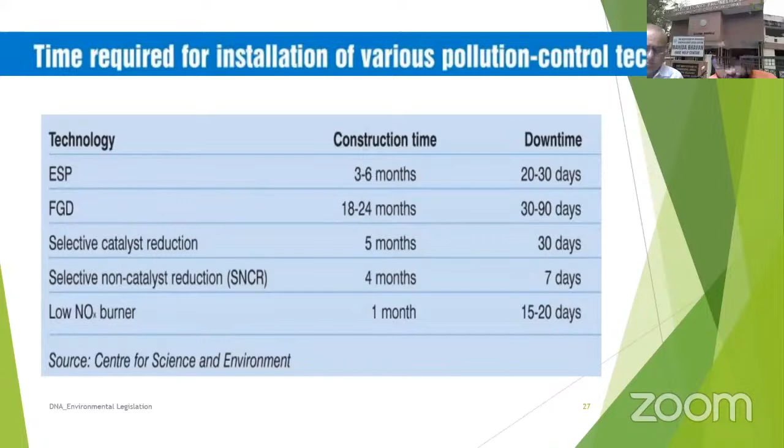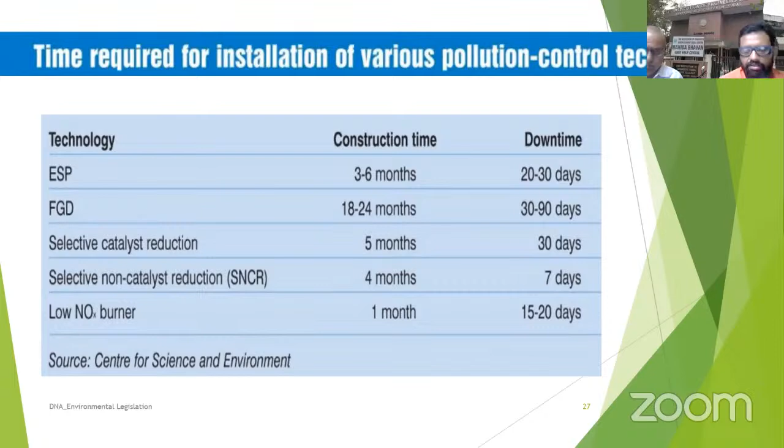If we talk about the time duration, right? For the ESP's construction it is 3 to 6 months, and the shutdown required is 20 to 30 days. For the FGD, 18 to 24 months, and the shutdown required is 30 to 90 days, right? Apart from that, SCR or SNCR or low NOx burner, accordingly it is going to take 7 to 30 days.

Now, I'm going to talk about NOx control and NOx reduction. It is generated from the percentage of nitrogen present in air, and only when our combustion chamber temperature increases above 1050 or 1100 degrees Celsius is this NOx generated. Right. So the first tool is engineering control, or combustion control. In this method, we use the low NOx burner. We can also use the overfire damper or overfire port, through which we can dilute the temperature of the furnace and reduce the formation of NOx. Apart from that, gas recirculation systems and water and steam injection systems are also there.

So in the gas turbine, right, in the frame 6B or frame 9 GT, we have steam injection or water injection systems incorporated in the combustion chambers, right? So that we can reduce the temperature of the combustion zone. This is engineering control, through which we do stage wise combustion, right? We do the combustion in stages, so that our temperature stays within the profile of 1050 or below 1100 degrees Celsius, at the boundary of NOx. We don't go on the higher side, where more and more NOx is generated.

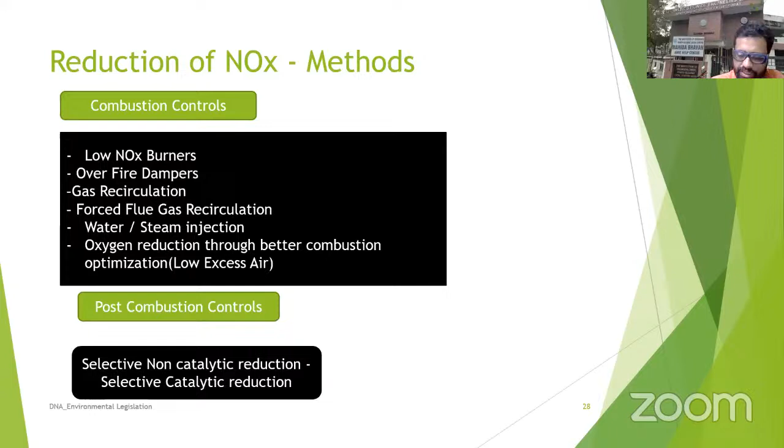Apart from that, suppose we have the facility for post combustion. In post combustion, we dose some reagent like ammonia or some other liquids in the furnace. How this is implemented and how it is proportioned, I'm going to show here.

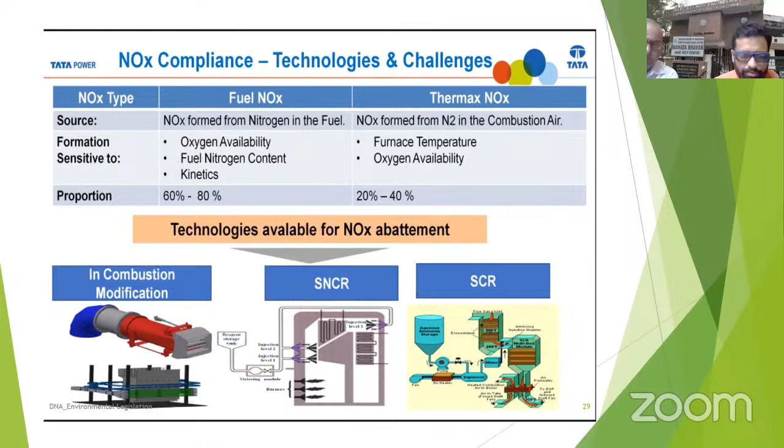So the fuel NOx depends on the availability of oxygen and the nitrogen content, like the ammonia we are using. And in another category, thermal NOx, NOx is going to form in the combustion chamber, where furnace temperature and oxygen availability are sensitive. So this is also a challenge for NOx control.

First is the combustion technology we are going to use. For that, the better option is the low NOx burner. Yes, a low NOx burner is definitely an advantage, because we improve the combustion stage-wise. So this is going to be much more helpful.

The second is OFA, overfire air, or separated overfire air, SOFA. This can be implemented in CFBC, AFBC, or in the PF units, where we can implement it and control the temperature, right? So this is going to help in the combustion technology.

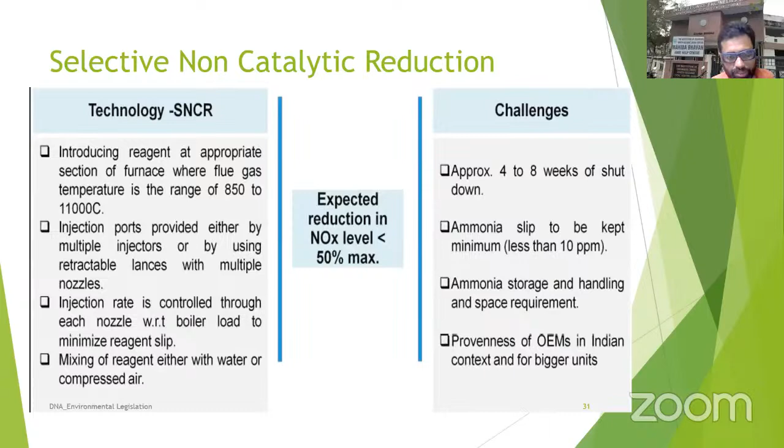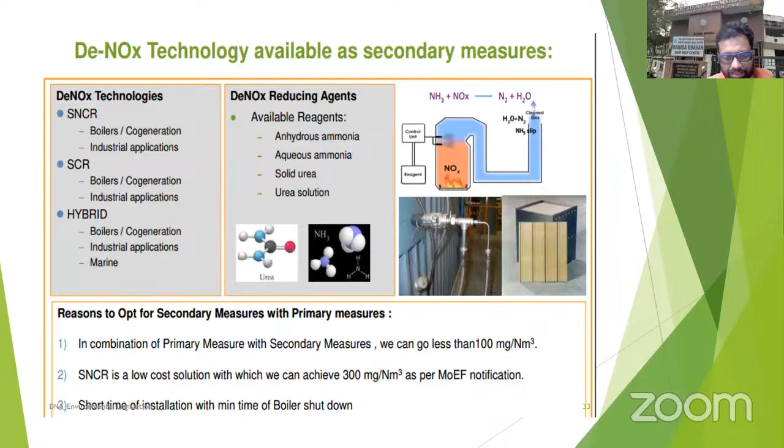Apart from this, we can use catalytic reduction, right? For that we have implemented systems for the NOx. I'm going to show how it works. Here is the DeNOx system, or DeNOx technology, used in the water wall, so that inside here it is going to spray, right?

So this is the air-cooled lance. It is installed because it continuously lives in the furnace temperature-exposed area, so that it is not harmed. It is made of SS, and the lance is always air-cooled.

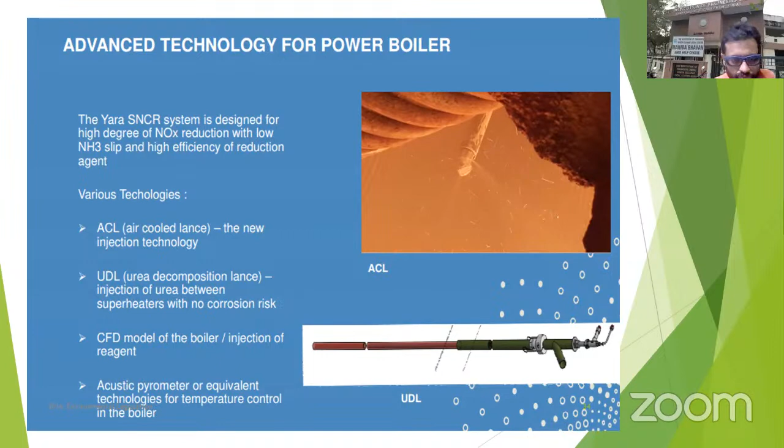Second, we have the urea decomposition lance, and a CFD model of the boiler and injection of the reagent, so that here we are going to spray. This is the selective non-catalytic reduction technology we are using, and we spray ammonia.

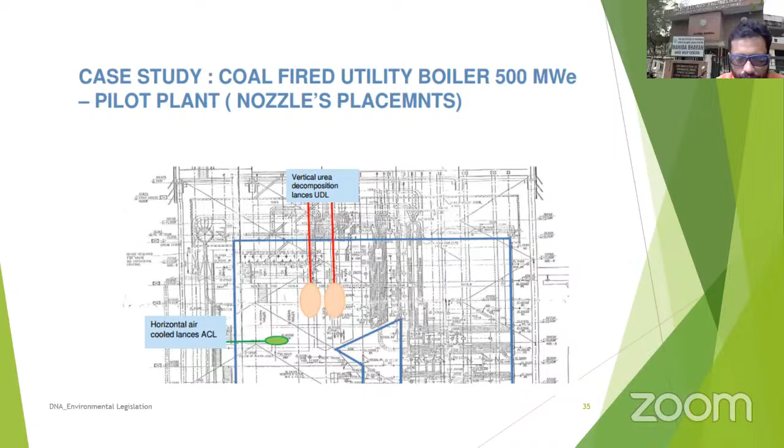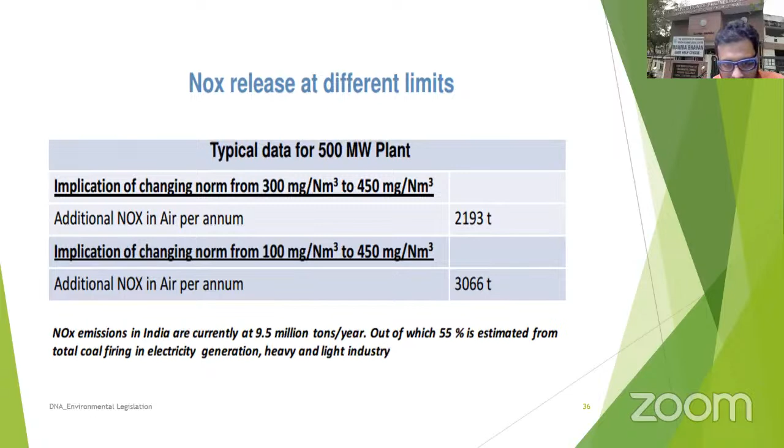So just a little analysis and data on a calculation basis: if we reduce from 450 to 300 milligram per normal cubic meter, the reduction in NOx is 2193 ton. If we implement from 450 to 100, then we reduce NOx by 3066 ton. So this is a much more effective way.

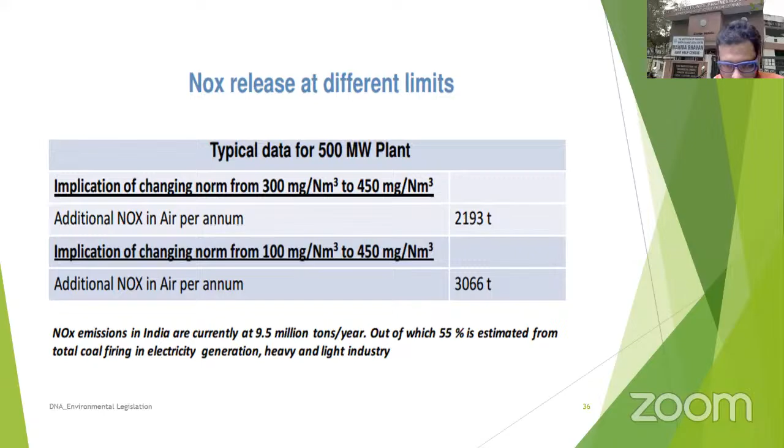Now I'm going to explain one or two things about LOI management in the boiler. Suppose we have higher LOI, then we can recycle the field fly ash to the bunker, or mix high LOI field ash with the coal, so that more carbon can be burned again.

The second lucrative solution right now, in most thermal power plants in India, is biomass; we are using bio briquettes. This also helps to reduce emissions, because for the same 1 kilowatt-hour of power generation, through biomass only 0.4 to 0.6 kg of CO2 is emitted. Right. So why does this happen?

Because in comparison, for the same GCV of coal, suppose 1 kg of coal with 3,500 GCV, for the same GCV of biomass we have less carbon, and due to the higher VM in the biomass, our emission is only 0.4 to 0.6 kg. If we use a 5% blend of biomass, we are going to reduce 1.5% of the total emission in India, right?

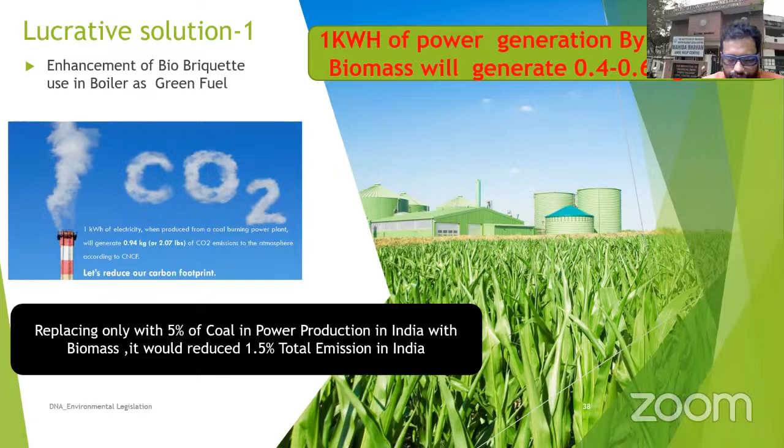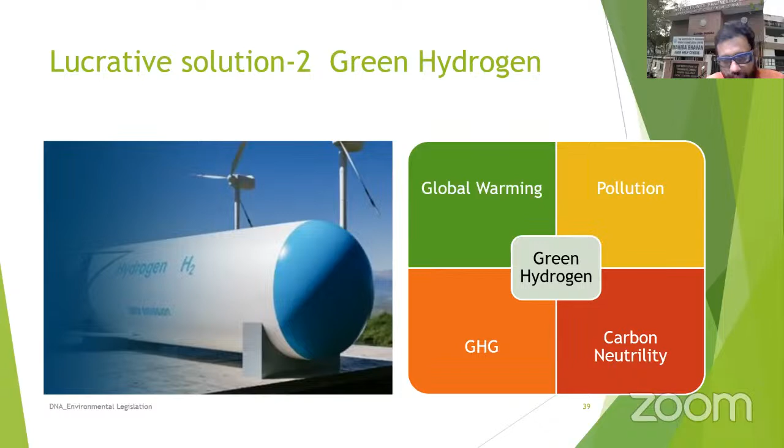Another very lucrative solution is green hydrogen. Although it is not implemented anywhere, it has lots of potential in terms of environmental solutions, right? Right now we are facing the problems of global warming, pollution, carbon neutrality, and greenhouse gases. These are all going to be solved through green hydrogen use, right? Why? Just see these slides.

If I burn 1 kg of carbon, it generates heat of 8,084 kilocalories. But if we burn 1 kg of hydrogen, it gives 28,922 kilocalories per kg. This figure clearly indicates that with the use of hydrogen, we are able to get a much higher amount of energy.